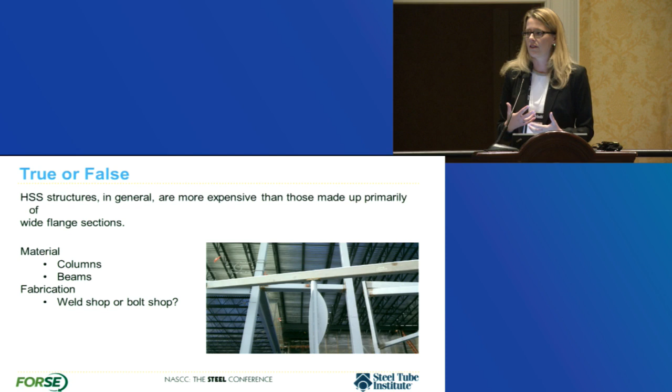And then when it comes to fabrication, so that's thinking about one piece of it, which is just the material. When we talk about the fabrication, fabrication is expensive. There's the thought process or the feeling out there that fabrication when it comes to HSS is always expensive. It's very expensive. It's going to be more expensive than using open sections. And that's not always the case. It is sometimes the case, but what I've found is that really tends to go towards details that are not well thought through, or maybe specifying one detail to cover every condition on a job. And we'll talk about some of those conditions as we get through here.

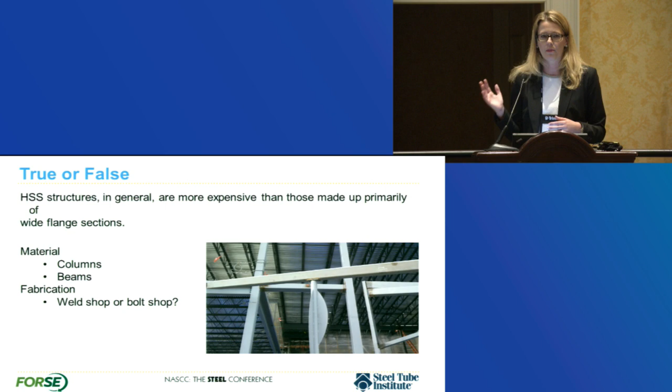So what I want to start with is that we need to think through all of these details. Even though some of the material may be more efficient in using HSS, if we don't think about the details and the fabrication side of that, all of that economics can be thrown out the window if we don't think through them.

So why are we even talking about this? As a consultant with the Steel Tube Institute, the number one complaint that I hear about why people don't want to use HSS is that it's expensive. So I started wanting to drill down into that, because I know that material-wise, that's not always the case, that a lot of times a closed section is more economical than some of the other options.

Then I start hearing about connections. Well, connections are hard to design. There are not enough resources out there. So we've been working on that as well. But going a little bit further, we've heard that there are fabricators that don't like to do HSS projects, or their feeling is that they're very expensive.

And so what I really wanted to do as a structural engineer is to get some input from a fabricator, because I obviously don't live in that world. I wanted to know more about what we are doing as engineers that causes these fabrication costs to go up so high. So what we did with the Steel Tube Institute is we had a spring meeting.

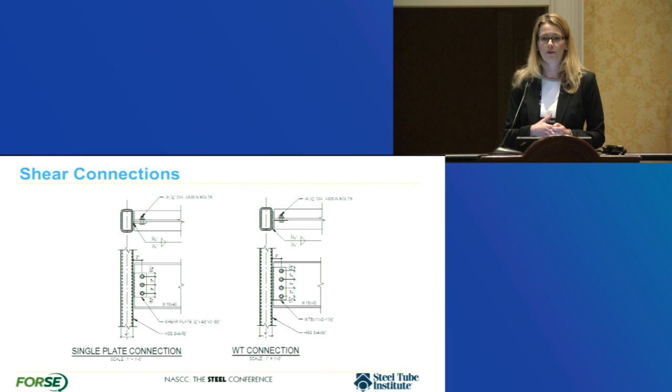If that doesn't work for me, I can also go to a WT connection where I'm welding twice to the tube and then bolting to the beam web as well. And then next I can look at a double angle connection. This is a little bit more expensive, but you get a little bit more capacity out of it. What you need to think about with these double angle connections is the width of the column. I obviously can't put 2 angles on an HSS 4x4 column, so I need to have a wider column if this is the type of connection that I'm going to specify.

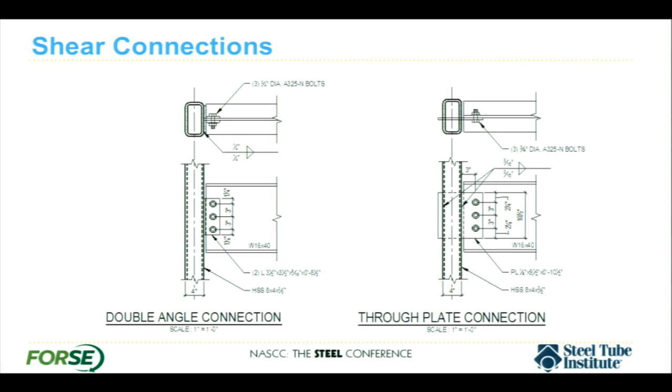Like is shown in this diagram, I've got a rectangular column with a wider face that I can use that double angle connection with. Unlike what's shown in my sketch, there would be some coping required for erectability, so you may need to double cope this beam in order to erect it efficiently. And lastly, the most expensive connection is this through plate connection, where you slot the tube on 2 faces and pass a single plate through the slot, and then you can weld the plate to the tube walls. So you actually get 4 welds on a through plate.

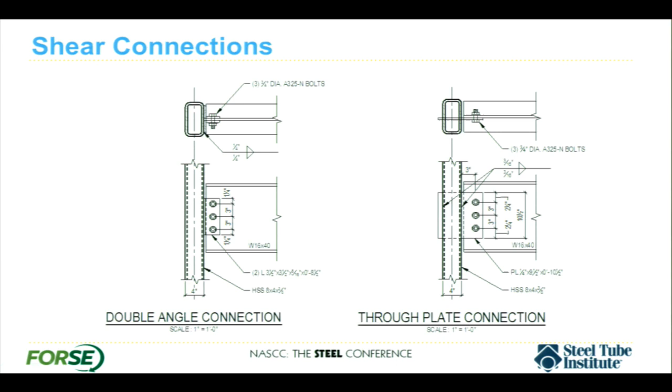Of these 4, only 2 can be used if you've got circular columns. I've shown rectangular columns where you can use all of them, but if you've got circular columns, the only 2 options you have are the single plate and the through plate connection. For the through plate, research has found that it's 4 times more expensive to specify. I thought, as an engineer, that we had moved past through plates, that nobody's really specifying them anymore, only when we absolutely need them. But in talking to these fabricators, evidently there are a lot of people that are still specifying them. They are still showing up as your standard connection detail that gets passed from drawing set to drawing set.

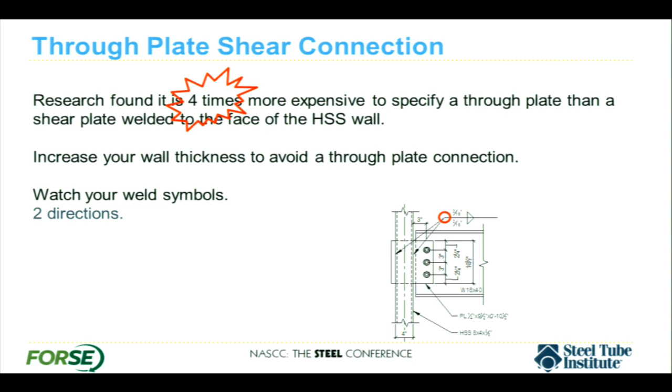A couple more things that they brought to my attention that I thought were interesting: if we look at this type of connection here where I've got a single through plate going through, one single plate going through in one direction actually requires a full extra hour of shop time. So you can imagine if this is my typical connection on a structure that has 40 or 50 of these things on it, how much extra time is being built up because I've specified this as my standard connection, and how much money I can save the project by going to a single plate connection.

Something that was also interesting that I wasn't aware of after talking to these fabricators is that there are some people that maybe aren't watching their weld symbols and they actually put the all-around symbol, and whether they meant to or not, they actually required the fabricator to weld that through plate on the inside of the tube. No joke, it's happened. And so what they ended up having to do is they literally had to chop off the top of the column so that they could get in and make that weld of the through plate to the inside of the tube and then weld the column back together. Obviously, not the best idea.

Along with that, that same fabricator also showed me an example of a condition where someone had specified through plates in two directions. So again, the fabricator had to cut the column in half because there are through plates. I can understand if it's your standard connection, you don't think you've got beams coming in both directions, you just didn't think about it, right? Maybe? So the fabricator had to lop off the top of the column, get those through plates in a crucifix form through the middle of the column, and then put the column back together.

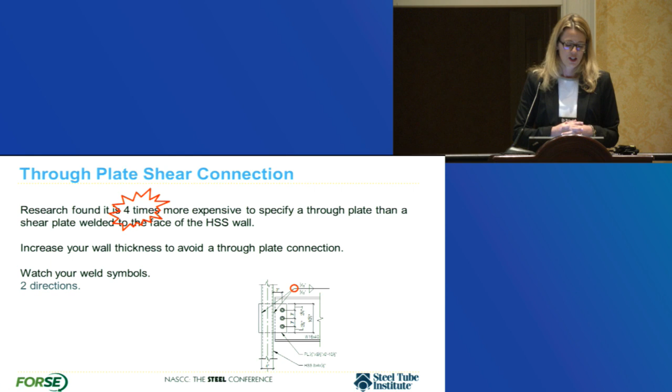So, moral of the story is that what I want you to do is just not specify through plate connections as your standard connection. Obviously, there are reasons why we would need to specify a through plate connection. You can't always get away with it. If it's used as a drag in your lateral system, so you're wanting to transfer axial load from one side of the column to the next, it's a very efficient connection to do that with. So go ahead and specify it in that condition.

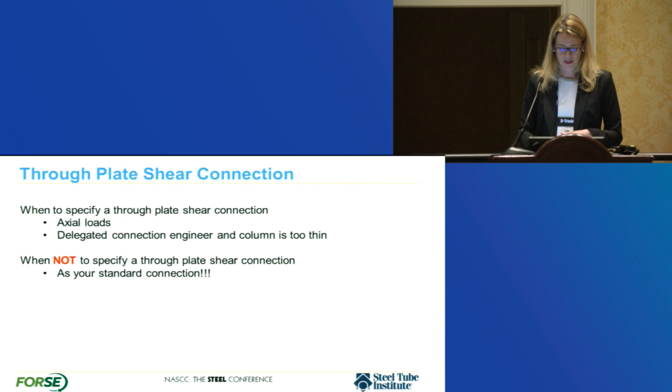Also, because our country is still split, maybe on the eastern part you don't always specify your own connection, in the western you typically do. If you get involved in designing someone else's connections, you might not have a choice. You might be stuck with a certain member size and having to design a connection that works for the loads and the members given to you. Obviously, in that type of situation, you might have to go with a through plate. But bottom line, let's just try not to specify through plate connections. Using the A1085 material allows you to use a little bit thicker wall and a higher yield strength than you may be using right now, so that's going to get you a little bit more capacity, which will help with that matter with the through plates.

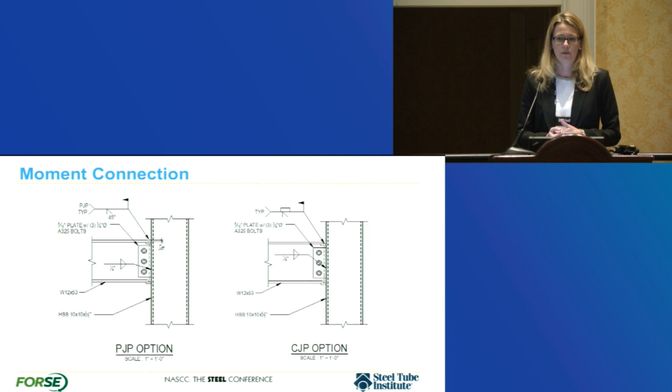All right, moving on to the next topic, which was moment connections. So again, I've got 4 moment connections that I'm going to show you that we discussed together. All 4 have about the same capacities. These are all non-pre-qualified connections that you would use in a wind or low seismic condition where you've got an R of 3 or less. And these are not in order of cost. I'll show you some cost input in a minute.

So the first 2 would be more of a directly welded moment connection. Starting on the left, we've got the partial pen weld there. We've got a 5/8 inch wall that we're using for this column.

This is actually going to be the most economical joint that I've come up with, but may not have all the capacity that you need. The CJP option is something that I've used in the past a bunch. Probably everybody's specified it, where you use a CJP weld to weld those flanges to the face of the tube.

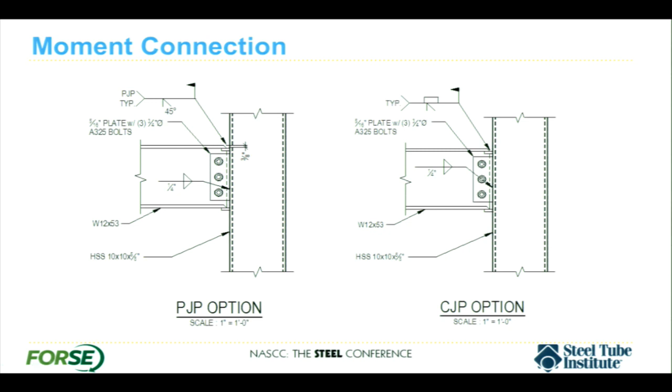The next 2 are a through plate and a cutout plate option. So a through plate, these are shown just being one-sided connection. Of course, they're probably more often than not actually 2 sides. The through plate option is very labor intensive and fabricators despise it. Because if you can imagine, this through plate is actually passed through the column, just like the shear connection.

For the plate for the top and the bottom flanges, you have to cut the column apart in order for this plate to pass through. It may pass through to a beam on the other side. You then have to weld all of these pieces back together. I've shown it here as a splice location, because if you're doing it, you might as well go ahead and splice your column there if you need to.

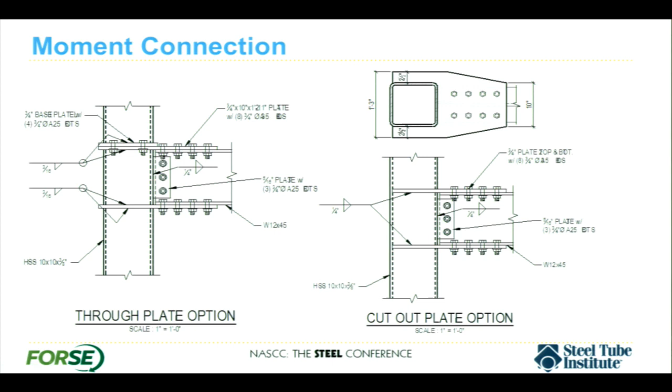The other option is similar to a through plate, but maybe less labor intensive, and that would be the cutout plate option. So in this option, the plate actually wraps itself around the column and is welded to it. If it's two-sided, the plate will splice somewhere around the midpoint of the column and then can be welded to each side. These two options here, it may be hard to read, but we can actually get away with a thinner column for the design of these moment connections, and I could get away with a 3/8" column there.

So kind of looking at the cost comparison, the relative costs, of course, vary. That's why I've just kind of given you ratios on a 1.0 scale, because costs on the East Coast versus costs on the West Coast versus a big fabricator versus a small fabricator versus all the factors in between, they're all going to be different, of course. So just take that in mind when you're looking at this. This is just to give you an idea of relatively how they stack up to each other.

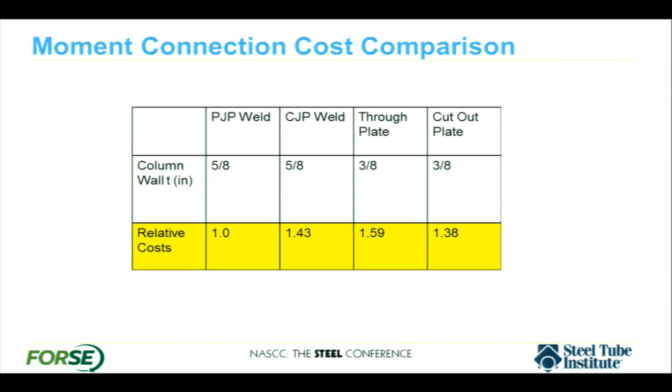So the PJP weld to the face of the column was going to be the least expensive. And you notice that I had to go with a thicker wall. That's all included in here. The material costs and the inspection costs are included with these fabrication costs that I built into this matrix. So with that PJP connection, even though I had to go with a 5/8" wall as compared to a 3/8" with some of the other connections, it's still going to be the least expensive.

Notice also that the CJP weld, because of all of the testing that is required and extra fit up in the shop that's required to do this type of connection, it is going to be more expensive. It's got a thicker wall and a lot more time required to do that type of connection. So it's going to be one of the two priciest.

Obviously, it kind of makes sense that the through plate connection is the most expensive because of all the work involved in passing those plates through and then reconnecting the column up together, even though I can use a slightly thinner member. And then lastly, with a cutout plate connection, I can use a thinner member. It's still a little bit pricier, but maybe it's a better option if I need more strength than what I can get out of a PJP weld.

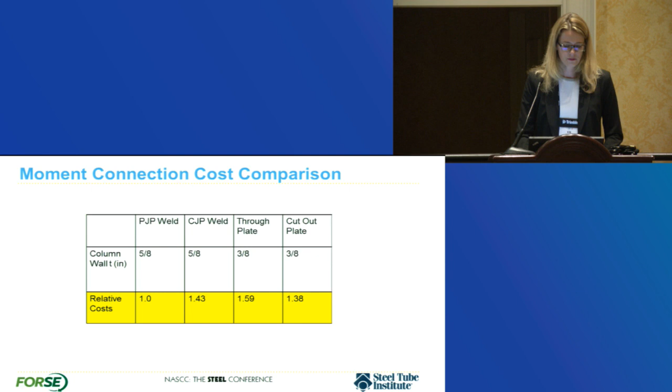All right, so moving on to trusses and types of welds, when you're not just welding trusses, but if you're ever welding a tube to a tube together. So if we're using a tube beam to a column, some of these rules would apply as well. We would need to think about matched versus stepped connections.

So matched connection is what every architect that you'll ever work with is going to demand. They're going to want it. It's pretty, right? We've got an HSS branch member, HSS 6x6 branch member coming into an HSS 6x6 chord member, right? Fits up beautifully. The problem is that it's very hard to fabricate something like that and can cost money and can be hard for you to get the calculations to work as well.

This really, when it comes to stepped and matched connections, really impacts the thicker tubes and the bigger tubes the most because of that radius that you see there on the corner on the left-hand side.

So here it's not shown as bad, but if we get a thicker tube, then you're going to have a larger bending radius. The way that when they bend the tubes, in general, it's 2 times the thickness of the tube. So a thicker tube is going to have a larger radius. Therefore, when that curve is bigger, when it comes to trying to fit that up, you may need some steel backing or some kind of weld backing in there that might be required to close that root of the joint in order to make that flare bevel weld there.

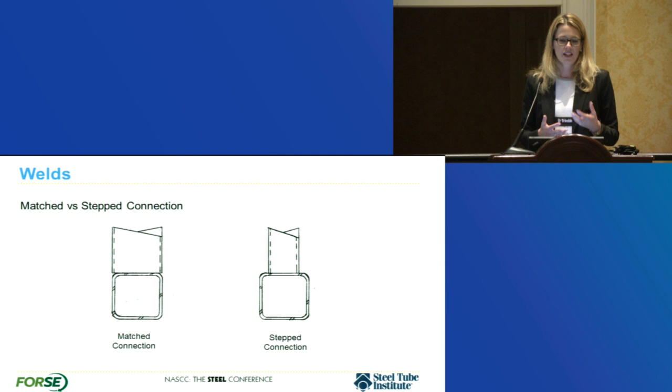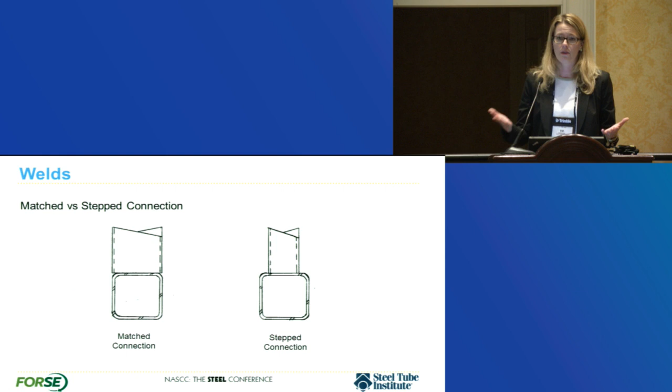But if I talk to an architect and alert them to some of the benefits and the cost benefits to this, it may actually work out in your favor. For instance, if I'm putting together a truss that is going to be 40 feet in the air, are you really going to be able to tell if it's a matched truss or a stepped truss? But it may end up saving the project thousands and thousands of dollars in fabrication costs, right?

A really good example of this, I was just in Oklahoma City, or in Stillwater, but I flew in and out of Oklahoma City last week, I'm sorry, and I took a look at this bridge. This is a great example. So this bridge spans 380 feet, I believe, across I-40 in Oklahoma City. You fly under it going 80 miles an hour, right? Can anybody tell that it's a stepped or a matched connection? No, it looks matched. Looks beautiful, right? Only a crazy person like me crawls up the hill to try and get a great picture of it.

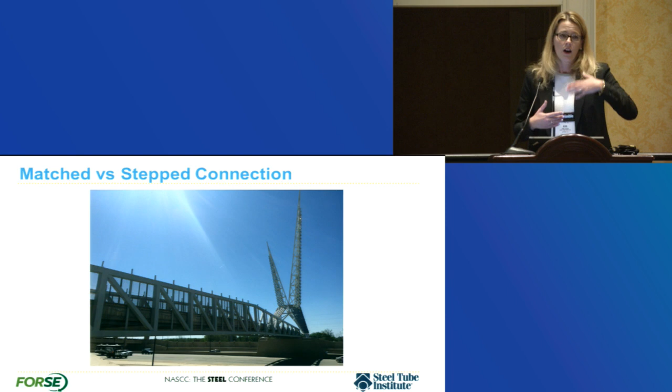But this is a perfect example. This is actually a stepped connection. The diagonal branch members are slightly narrower than the continuous chord member, but you would never be able to tell at 80 miles an hour going under there on I-40, right? So it's all about, kind of along the lines of AESS, if we are not going to see the truss, it's going to be 40 feet in the air, maybe you can get away with a stepped connection and save the project a bunch of fabrication costs in that respect.

With trusses, the rule of thumb is that minimum weight of the truss does not equal the least cost. And I would venture to expand this to a lot of things that apply to HSS, not just trusses, but a lot of member design: least weight is not always going to equal the least amount of cost. With HSS members, it's very hard to reinforce them. It's a little bit easier on some other members that you may use, but we can't just slap a stiffener on there and make all of our problems go away. So it is to your benefit to design your members, to think about your connection, and you might want to bump up your wall thickness a little bit more to make your connections a little bit easier.

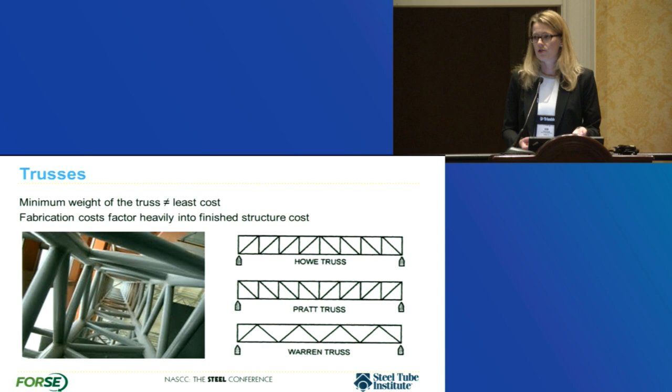In addition, because these connections can be costly, you may think the Howe or the Pratt truss might be most economical because your members aren't spanning very far. Even though the members are going to span a little bit farther in the Warren truss, because the number of connections goes down, that's actually going to be the most economical solution that you can have amongst those three.

When you're sizing your weld for trusses, there are really a couple of options. You can size to develop the yield strength of the branch member, which is very conservative. It tends to hit the upper limit of a weld size, and may be required in some instances. For instance, if you're designing something supporting moving loads, you might need to develop the capacity of the member, but it's probably not the most economical solution.

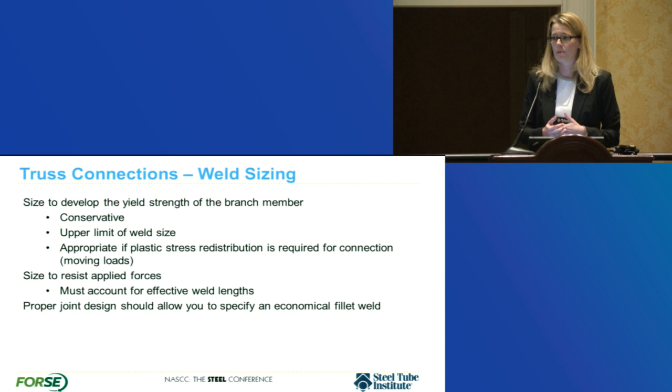Most economical, and most preferred by fabricators, would be to size to resist the actual applied load. So don't put on your drawings "size the welds to meet the yield strength of the member" or something like that, which I think was commonly done if you're not designing your own connection. As a rule of thumb, if you properly design the members and the joint design, then hopefully an economical fillet weld is mostly what you will end up with if the members have been appropriately sized.

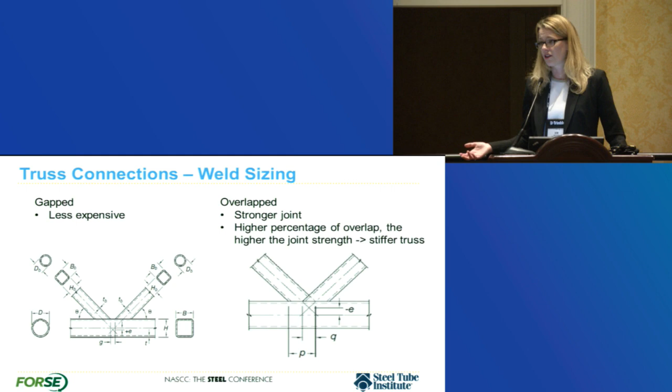This has a high impact on truss connections, obviously, because of the fabrication costs. The two options are gapped and overlap. Gapped is obviously the least expensive of the two options. It's nice because it leaves a little bit of tolerance when they're trying to fit up a truss. An overlap connection is obviously stronger, so structurally sometimes we depend on that. We will do an overlap connection when you've got large branch loads or we actually need to transfer loads between two branches. But the gap really gives the flexibility of fit up.

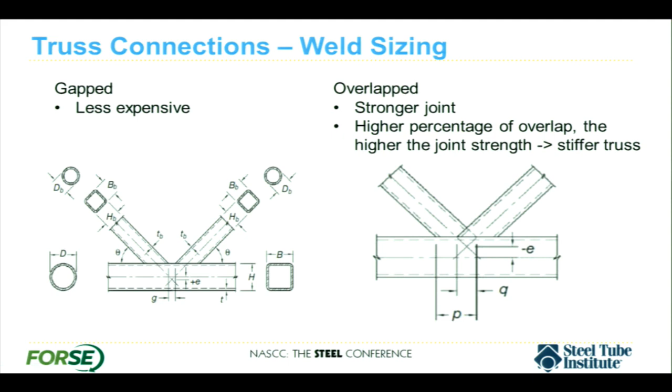So a lot of times in the shop, fabricators would like to tack weld their members together to make sure that everything's going to fit before they go through final welding. They obviously can't do that if they've got an overlap connection, because they need to make a weld before they can come back and fit up the rest of the truss. So a gapped connection is going to give us a little bit more economics in fabrication.

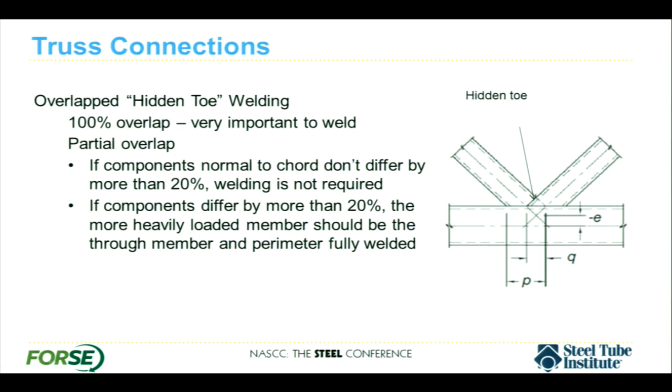When do we need an overlap? I mentioned if there are high stresses or if we're trying to transfer load between these two. Also, if the components between the two branch members differ by more than 20%, then the more heavily loaded branch member needs to be the through member and welded all around.

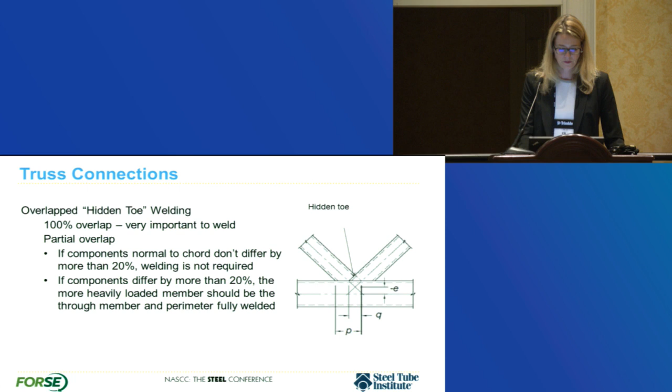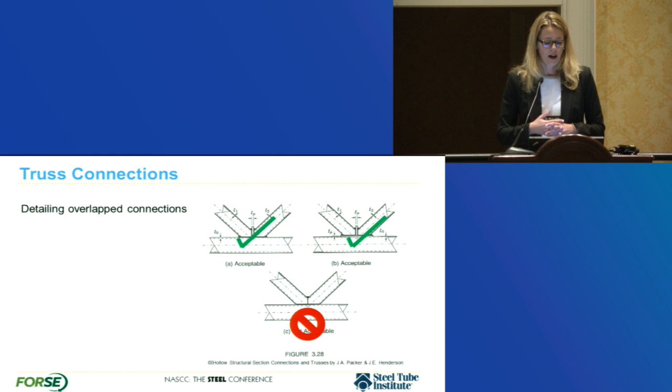With an overlapped connection, there are also a couple of different options for how you do it. I've seen architects want this type of detail. If you're going to do this where you've got this bevel in two directions, that obviously adds cost because we're adding to the cutting that is required of the tube. But if you're going to do that, you really want to add this plate that you see in the middle. It's a little bit hard, my check mark moved a little bit. So you want to use A or B. Number C, where you're just welding them together, is not going to develop the strength of an overlapping connection, and it's probably going to unnecessarily add huge costs because you can see you have very little flexibility in that connection.

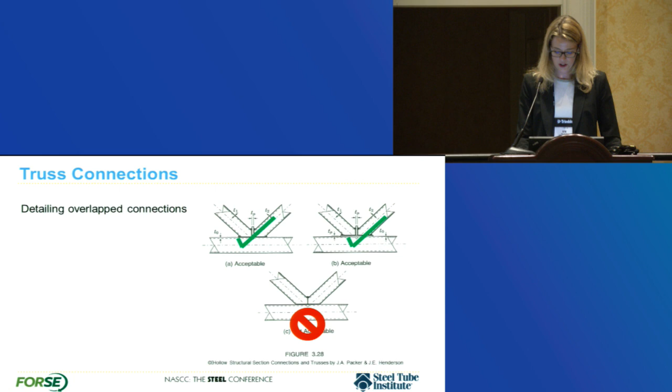Round HSS for trusses can add three times the amount of cost to the connection. Whenever I think about round HSSs and trusses, I don't know why, but I always think of log rolling competitions and these little round members rolling around. So they are more expensive.

Of course, they may be required or needed, but for a fabricator, they're harder to handle. You can imagine they're harder for them to lay out, harder for them to find the correct orientation. If they've marked it on one end, they have to make sure they can align it on the other end. So they're just a little bit more difficult and can also add to your fabrication costs. So if you have a choice, it might be better to specify a rectangular section.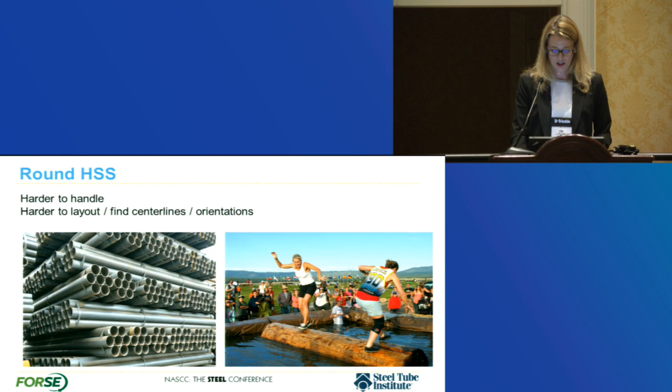With all that being said, there are quite a few technology improvements in the tubular fabrication department that are helping us decrease our cost. One of those is tube profiler laser cutting machines. These are being purchased by fabricators, and I've also heard of them being purchased by regional service centers. The service center could then offer their clients some of the cutting or profiling of the tubes or pipes, to be able to outsource that kind of work, which would lead to more fabricators having more opportunities for these complicated projects that require maybe rounds especially, or rectangles being profiled in two directions.

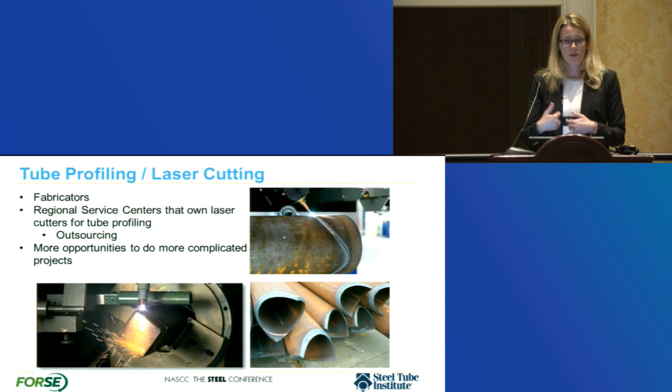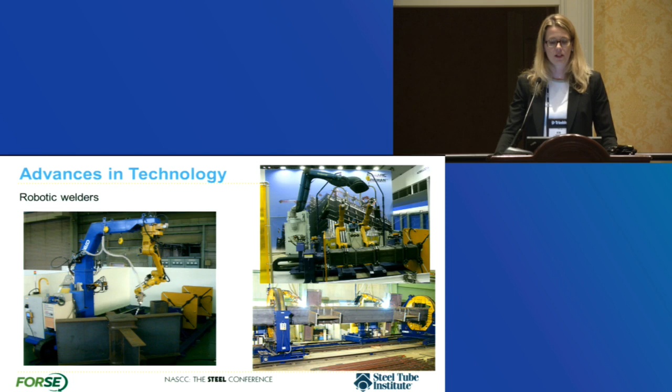We talked a little bit about PJP versus CJP welds, concerning tube-to-tube connections. Obviously, PJP or partial joint penetration welds are a great option if your fillet welds become too large. So I would push your fillet welds up to maybe, if you can get up to a 1/2 inch, use a fillet weld. And then if you can't get that to work, then you can jump to a partial joint penetration weld.

If you're welding tubes to tubes and you specify a complete joint penetration weld without any backing, that requires a 6GR welding certification. It requires special fit-up. And that may be okay if the fabrication is being done in Houston or someplace along the Gulf where they do a lot of offshore work and a lot of those kinds of welds. But it's probably not the most economical thing to specify for the rest of the country.

What I've found actually, from talking to fabricators, is that sometimes the inspection on those welds just isn't done, or it's done inappropriately. So when we're specifying tube-to-tube connections, we want to avoid those complete joint penetrations, both for the difficulty and for the inspection.

And just to give you an idea of what we're talking about cost-wise, for a tube-to-tube connection in a typical shop, if we've specified a fillet weld, it may take about 2 hours of fit-up for one guy to do in the shop, 2 hours. If we've specified a complete joint penetration weld of a tube-to-tube connection, it takes 1 to 1.5 days of fit-up for that same guy. Plus, obviously, the owner is incurring the inspection costs. So quite a bit of money is involved. And again, what may benefit this is proper sizing of the tubes to begin with so that we can get a fillet weld to work.

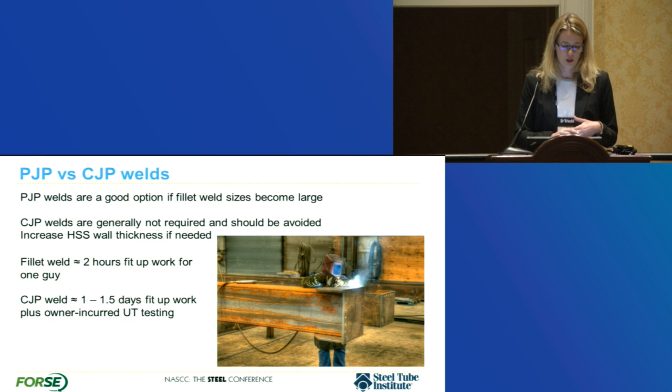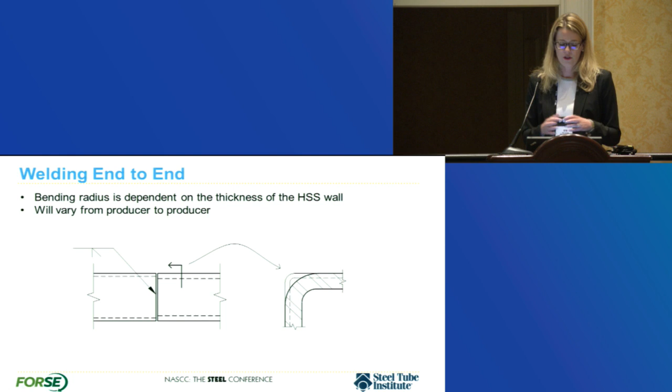So if you have one 8x8 by a quarter coming from one producer and an 8x8 by a quarter coming from another producer, and they happen to get mixed up in distribution or just along the way of their life, they could have slightly different radiuses if we're trying to weld them together. So it's something you just need to be aware of and maybe take into account as you're specifying some connections. You might want to do something that has a little bit more give in the connection, maybe two end plates together if you can, rather than just directly welding them together, which doesn't always give a lot of tolerance.

And of course, if I'm doing two like are shown in this diagram that have two different thicknesses, then I may have a bigger problem. Obviously this is exaggerated, but it's to illustrate the problem that I might have if I'm trying to weld them together. We'll get a great weld along the flat of the tube, but maybe no weld along the radius.

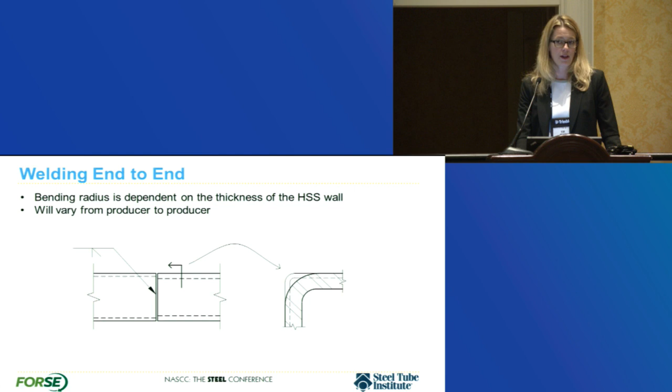Through bolting. Obviously, we can't just send our tubes down the same line that a wide flange goes down for bolt holes to be drilled. They may need to be manually drilled. There are lots of options besides through bolting, so there are many of them here actually for bolting two tubes. There are lots of products that are available, and you can see them in the exposition hall. Bolt lengths for through bolts typically are going to exceed what's standard.

So the standard bolt length that's stocked in every shop, we actually need something longer if we're going to ask it to go all the way through a tube, and so they may be a special order or maybe harder to get. Sometimes it's difficult to install. I'm sure those of you with young kids have tried installing different Legos or things where you're trying to get something through a hollow member. It can be a little bit difficult to install in the field. And if you do design it, then you need to treat it as a pin-type connection with the reduced bearing values that are specified in AISC 360.

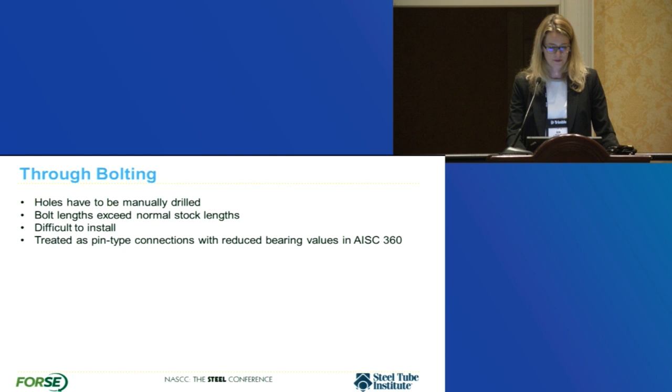When it comes to the lengths of members, another thing that I heard from fabricators that they don't love about HSS is some of the waste. And some of this, as engineers, I don't know that we can really control. However, if we do work on jobs that have a lot of HSS, and if you have some communication with a contractor, like if maybe you're in a design build or a design assist application, it may be beneficial for that contractor to go ahead and contact a mill that they will be producing tube from, because if a mill is selling their tube to a service center, they're typically going to sell in a certain length that the service center has requested.

A little bit different than the way that they procure wide flange. So if you do have a lot of tubes, they can contact the mill and get a specific length that is required for your job, which may end up in a little bit less waste. So if you get a contractor asking for it, that's why. They're just trying to reduce the waste, and if you can give that type of information to them, they can pass it along to the mill and purchase exactly what they're looking for and reduce some of that.

We also hear from fabricators, one of the big ticket items was the heartburn that they have with the number of sizes out there of tubes, and I'm sure you're well aware that there's a lot of different sizes that you can pick from. As a practicing engineer, how do you know what's produced, what's readily available, what I can get? I know as an engineer the last thing I want to hear from my fabricator is, sorry, that size that you specified on your drawings, I can't find it anywhere. So you have to go back and redesign.

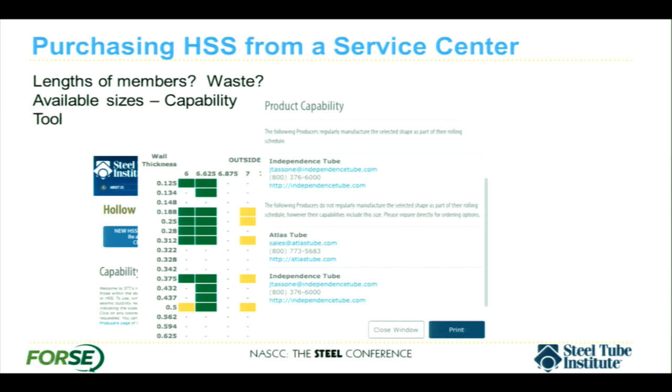You can contact us at the Steel Tube Institute and we can help you. But that means that none of our producers have the tooling to produce that section. If I click on one of the sections that I see either green or yellow, then I'm going to see exactly who it is that produces that section.

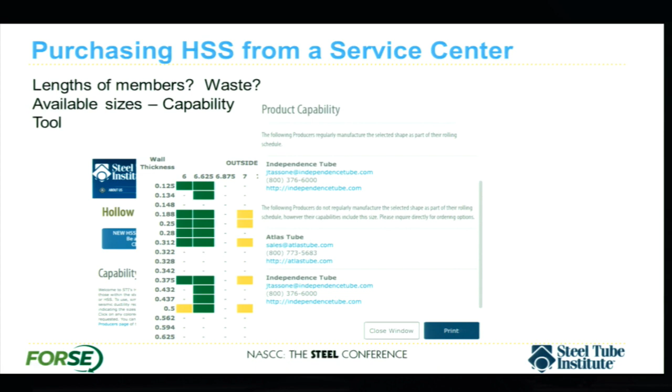So if I want to pass that information on to a fabricator, if they're looking for a section, or if I am a fabricator and I need to pass it along to my service center so that they can go ahead and locate the section, I can do that. So hopefully a tool to help you identify which sections may be more prevalent in the marketplace than others.

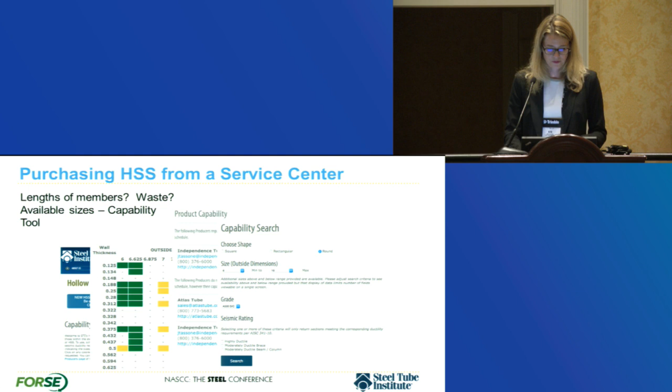Oh, there's my search section. So this is the search screen. Sorry, it got lost in the shuffle.

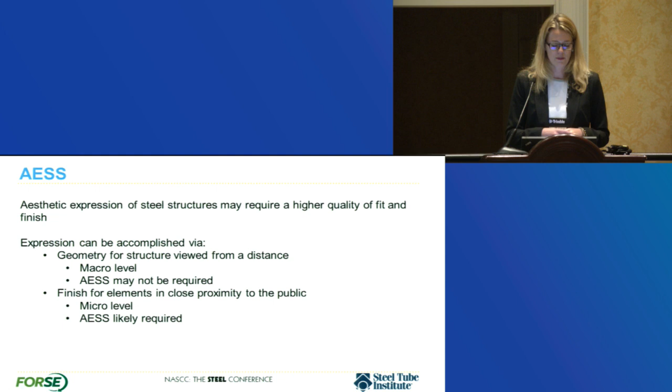All right, architecturally exposed structural steel. There was a bit of conversation about that when it comes to fabrication. Obviously, we probably all have an idea of what it is, especially when it comes to tubes. It's specified a lot as AESS. And again, kind of along the same lines as the matched versus step tube that I was talking about earlier, it all depends on how close you're going to be able to see the particular element on how you need to specify it.

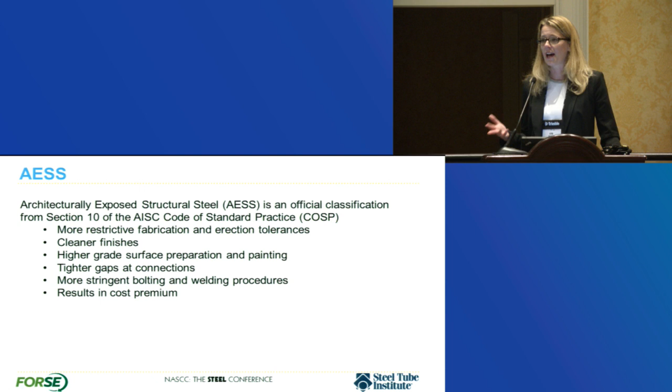AESS falls under Section 10 of the Code of Standard Practice. It obviously has more restrictive fabrication and erection tolerances, cleaner finishes, higher grade surface prep, tighter connection gaps, things like that. All of those great things are awesome for looking at, but they result in a higher cost premium. So make sure you're aware of what you're specifying when you specify something to be architecturally exposed structural steel.

Obviously, not everything that's exposed needs to be that. If I am sticking a column in a target, I don't know that I would really need to specify that to be an architecturally exposed structural steel, but it would obviously depend on the proximity that you are to the element.

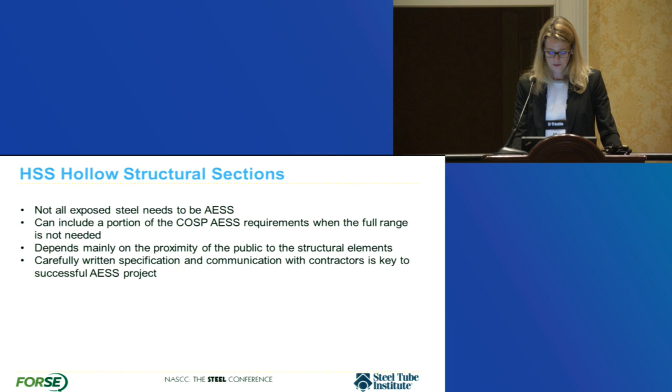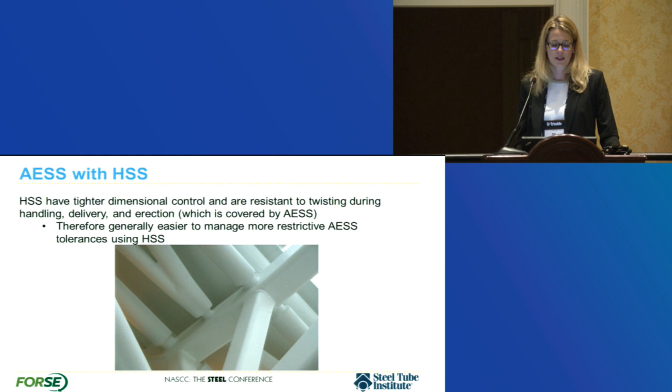HSS are used a lot, both because of their aesthetics, but also because they have a little bit tighter dimensional control. They're resistant to twisting when they're delivered and handled and in erection, all of which is covered by the architecturally exposed structural steel spec, and therefore that's generally why it's used a little bit more. The flash weld on the outside of the HSS is always removed during production. If you need the flash weld on the inside of the tube removed, you need to specify that on your contract documents because it's not a default. That would need to be passed along to the mill when the shape is formed.

Section 10.2.8 of the Code of Standard Practice states that the seams of HSS are acceptable as produced. So there's not really anything that we as producers would do differently to the seam weld, but obviously a fabricator is going to orient it away from view. That's what the Code of Standard Practice

says. Going a step further, fabricators have indicated to me that if you as an engineer, or maybe this is something you should talk about with an architect, have a highly architecturally sensitive tube in a location, maybe you want to discuss with your architect where you want that seam to be. Because the fabricator's idea of away from view may be different than the architect's idea of away from view. And you can specify that on your drawing so that the fabrication is done accordingly.

The surface of an A53 pipe has a coating on it, so I know there probably are some people out there that are still specifying A53 for their round sections instead of A500. You really should switch to A500. You're going to get a higher yield. You're going to get a pipe that hasn't been hydrostatically tested, so it's probably going to be less expensive. And you're going to get a pipe that doesn't have to have a bunch of work done before it's fabricated. Because that coating is there, it has to be removed before any welding and surface prep is done.

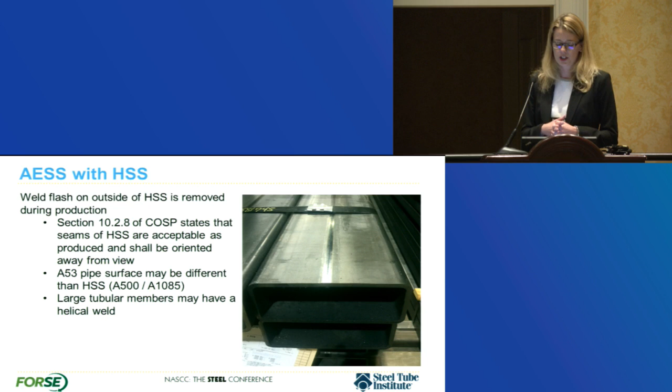And if you have specified large tubular members that may not be covered under the A500 specification, they may have spiral welds. So you want to make sure that you check what you're getting when you specify any round sections that are getting up there in size, maybe above 16-inch diameter.

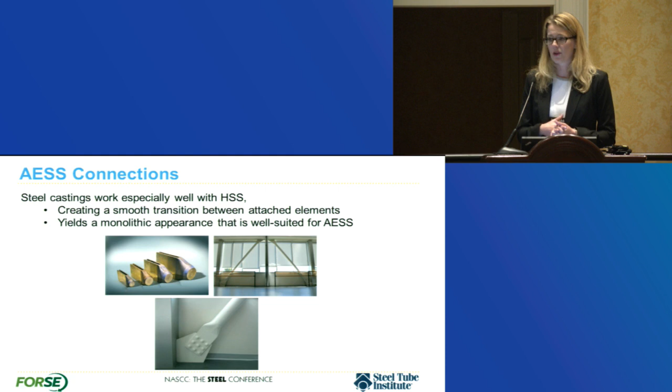These steel castings work really well for HSS in architecturally exposed situations. The casting is sent to the fabrication shop and a complete joint penetration weld is done around. It's a very clean, very nice look if you need to use those for braces. That's a great connection to do if it's an architecturally exposed situation.

Field welding usually requires any temporary bolted erection aids, and they can be removed. I know that I am very guilty of putting that sentence on my drawings. Shame to admit it, but I did. All welds ground smooth for an architecturally exposed condition. Please don't put that on your drawings.

I like to think that it's analogous to the tube-to-tube CJP. It just costs a ton of money, and really, I don't think that the product that you're going to end up with at the end is any better. It's going to cost a fabricator a lot of money, and the weld's going to look the same. It's kind of along those lines. So what the Code of Standard Practice actually says is a reasonably smooth and uniform weld, which probably is good enough for most AESS applications.

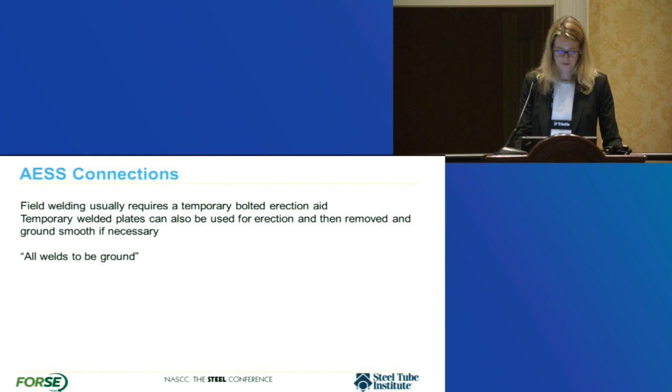Tolerances. This was probably the second biggest thing that I heard from my fabrication friends: that we as engineers need to have a better idea of what the tolerances are on these structures that we are specifying connections for, because I know I'm guilty of it. I kind of design in my little perfect world where everything is perfectly square, right? And there are no convex or concave walls, and my tubes are perfect, or my pipes are perfectly round. And I don't think about it, but we really need to think about it because HSS is no different than any other section that we deal with, and we need to leave a little bit of room in there if the walls aren't perfectly square.

So HSS do have relatively tight tolerances. A lot of fabricators like dealing with them because of that, but there still are tolerances. And this is probably something that you need to pay more attention to the larger the section that you get. So if you've got a 20 by 8 rectangular column, we need to think about how that might affect the connections that are going to be put together in the shop. So this is what A500 says on the left-hand side, the permissible variations, and it looks pretty small, right? There's a footnote that allows us to get larger tolerances for some of the larger rectangular shapes, and I've just done the math for you, and that's what's shown on the right-hand side there.

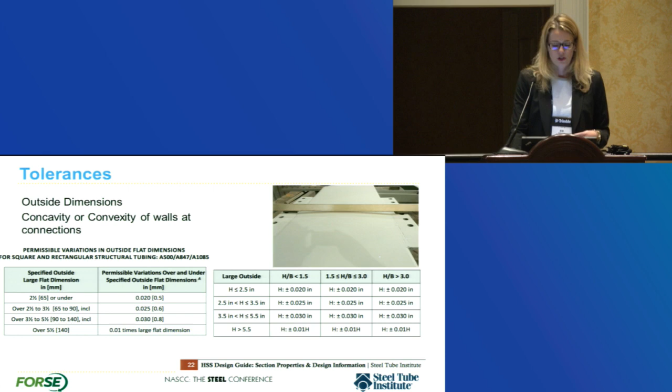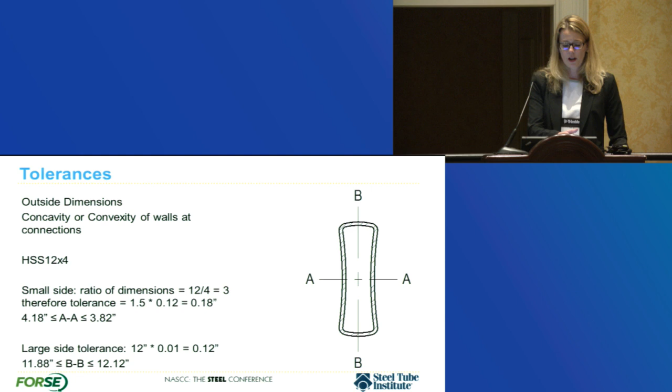So just to give you a real-world example of what we're talking about here, let's take a look at the HSS 12 by 4. Again, this diagram is greatly exaggerated. I hope you never see a tube like this. And we're not looking at large numbers here, but if we call for a connection when we've got two members like this, like an end plate connection that may have very little room for any of these tolerances, it might cause problems and adds costs on the fabrication side. So just running through the numbers real quick, for the small side, the ratio of the dimensions is 3 because it's a 12 by 4. So the tolerance is about 0.18 inches.

So that section AA, going across the width of the tube, it can range from 4.18 to 3.82, and I've got those numbers flipped backwards, sorry. So pretty tight tolerances there. But now we look at the larger side, so that 12-inch dimension, or you can imagine if this is 24, then this would be double this. But the 12-inch dimension, the tolerance is actually 0.01 times the dimension, so in our case ends up being 0.12. So that dimension can actually range from 11.88 up to 12.12.

Well, if I've got 11.88 on one end and I've got 12.12 on another end and I'm trying to connect something, I've got a 1/4 inch that I need to deal with, right? So something that we need to think about as engineers when we're detailing is that there may be some tolerances. And again, not something that we typically would have to deal with on a shape like this, but if I'm getting into some of the larger sections that are now available for us.

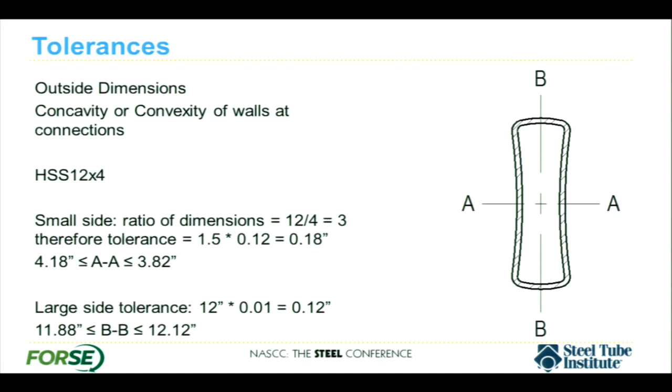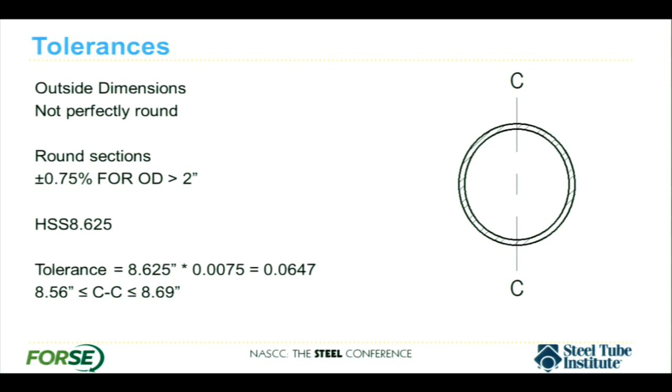Similarly, for round sections, they may not always be perfectly round. So there is a tolerance that's specified for round sections of 0.75% when your outside diameter dimension exceeds 2 inches. So what that equates to for an 8-inch standard pipe, like I've got here, is that it can range from 8.56 up to 8.69. So again, probably not an issue if we're dealing with it on one end, but if we're dealing with a larger pipe or this type of similar condition on both ends, it may be a problem for the fabricator.

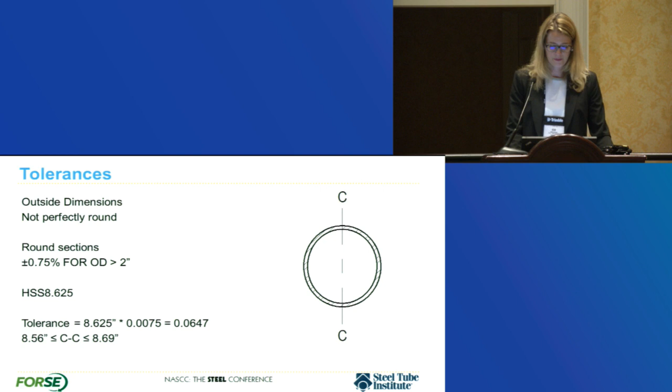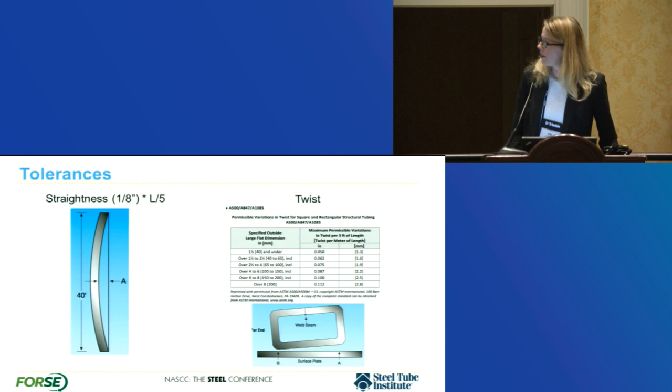There's also straightness tolerances, and for tubing, that equates to 1/8 of an inch for every 5 feet of length. Similarly, there are twist tolerances, and you can see those given here on the chart taken from A500.

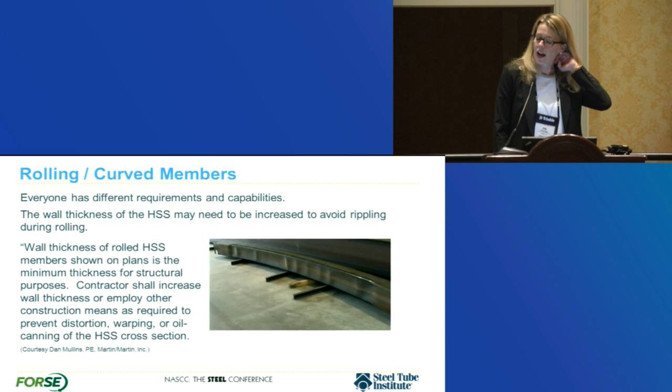But really, when talking to fabricators, it was mostly that concave wall and convex wall that they wanted to share that can be an issue with some connections. I often get asked about rolling and curving members, and this is kind of a side note.

I didn't have a fabricator specifically mention this to me, but I wanted to mention it because I think it goes well in it. I get asked a lot about what the capabilities are, what rules of thumb I should follow for rolling or curving members, and there really aren't rules of thumb because every roller has different capabilities. There are some that are very good at it and know how to do it really well and can bend at a very tight radius, and there are some that you don't want to bend at a very tight radius or have done it less often, and so they don't have as much experience or the equipment necessary to bend at those tight radiuses. And the thickness of the tube also depends on how that is performed.

I ran across this statement here from an old colleague of mine that I thought was really good for engineers. I'm sure there are contractors and fabricators on the other side that roll their eyes at this and think this is horrible, but as an engineer, I think this is a good way of covering ourselves if we need a thicker wall for rolling, because the fact of the matter is that I don't know who's going to roll the section. I know what I need for strength, but if I need a little bit more to get the radius that my architect is requesting, then I need the contractor to help me out with that. I think this is a way of alerting the contractor so that they can help me out and the costs are covered.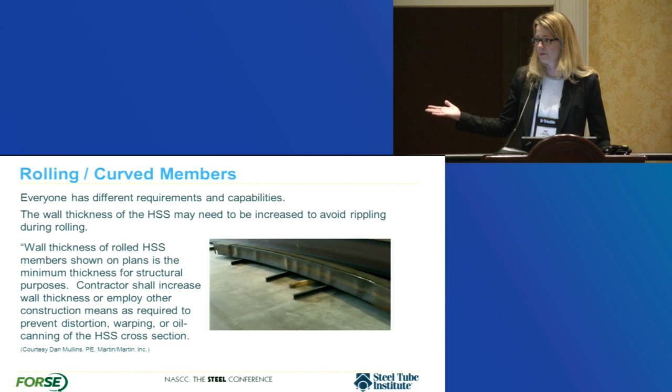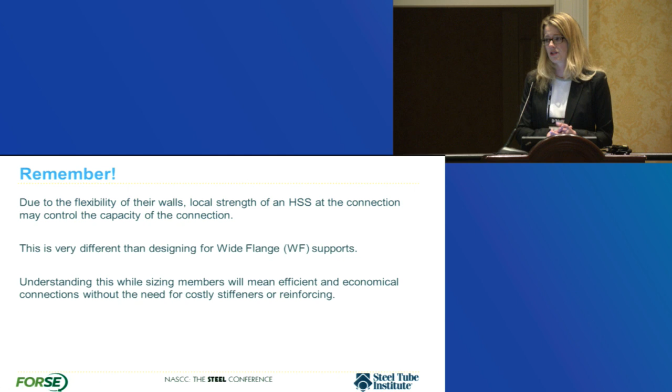Of course, I always want to remind everybody, and I've alluded to this, that due to the flexibility of an HSS section, the local strength of the HSS at the connection may control the capacity of the connection. So we can't just design in a box, where we typically would design all the members and then come back and design all of our connections. Or if I delegate my connections, I just design all of my members and think, oh, that's somebody else's problem. The way to end up with the most efficient section is to think about the connections when you're designing the HSS member. And there is a tool that will help you do that.

This does the checks that are specified in Chapter K. This is on the STI website. This is a great little tool for you to hop in as you're designing your members. It's not going to design everything for you, so it's not going to come up with weld sizes and bolts and things like that. But it will allow you to do a quick check of the member that you're designing to make sure that the walls are going to be okay. So we're not going to end up with punching shear or other failures that I didn't expect or that might be deal breakers when it comes back to me designing this connection later on. You may remember HSS Connex when it was DOS-based, just me. Now it's obviously on the web and available for all to use.

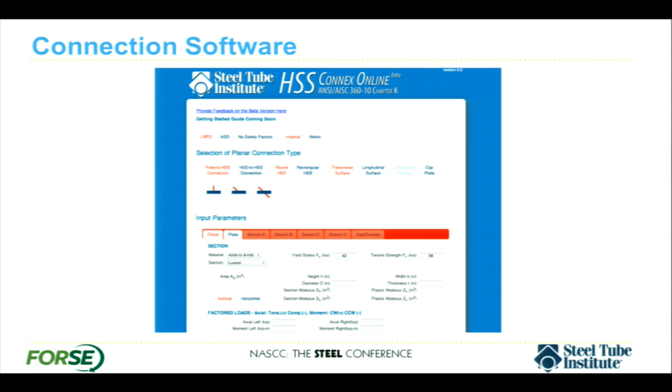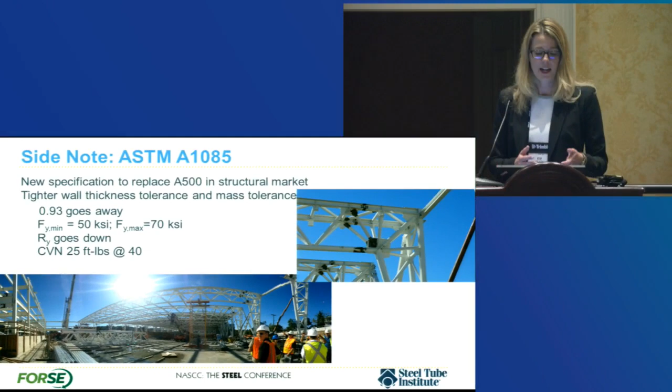Just a quick note, then I'll take some questions, about A1085. Hopefully you all have heard about it. I mentioned it earlier because you get a thicker wall with it. A1085 is a newer specification that's going to replace A500 in the structural marketplace. The reason it has a thicker wall is because the wall tolerances are tighter, so that gives us that thicker wall. It also allows us to get rid of the 0.93 factor that's specified in B4.2, I believe. It has one single yield strength, so regardless of the shape, there are no grades. It has a minimum yield strength of 50 ksi and an upper bound of 70 ksi.

What specifying that upper bound is going to do is bring down the Ry factor that we use in seismic capacity designs. It also has a standard Charpy V-notch test requirement, so if you need that for bridge type applications or other applications, 25 foot-pounds at 40 degrees Fahrenheit is standard for all the tubes that are produced for A1085. We have several producers making it right now. It's not in every service center across the nation, but it is starting to get out there in the marketplace, and if you specify it on your structural drawings now, you will be able to get it.